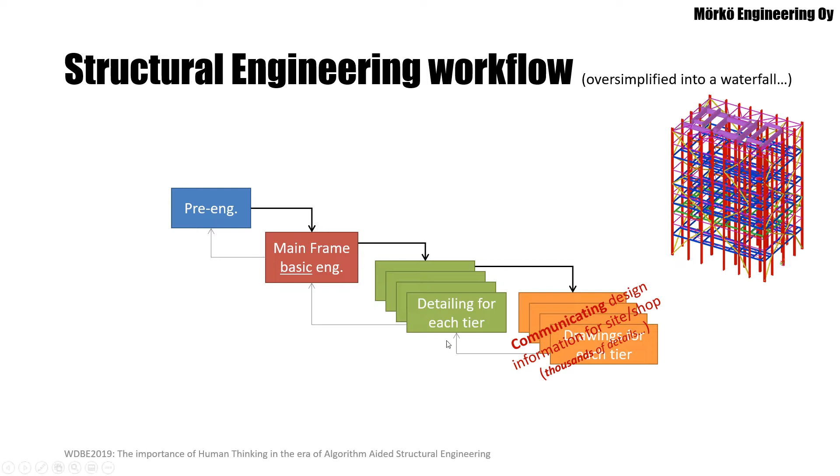Now, at the digitalization seminar, there were definitely some people present who don't like to talk about paper drawings anymore. So I just wanted to mention that the communication of the design information does not have to be paper drawings. That's important to mention when we're talking about digital built environment. But there is definitely some sort of communication phase where the design information is communicated to either the construction site or the workshop if the structure is prefabricated.

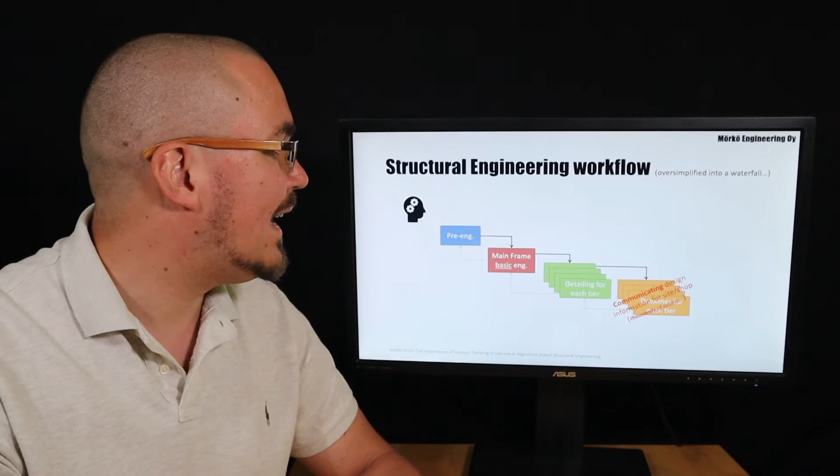Now, the beginning of this process does not have any raw material going on. An industrial process maybe has some raw material going on, but the design or engineering process of a construction is definitely a thinking process. There's only brain power going in as raw material, and then at the end of the process, there's not a single client who will order the project. Instead, there's a whole ecosystem of multiple stakeholders of the construction project, and all those stakeholders have an organization, and there's people in the organization for every single stakeholder.

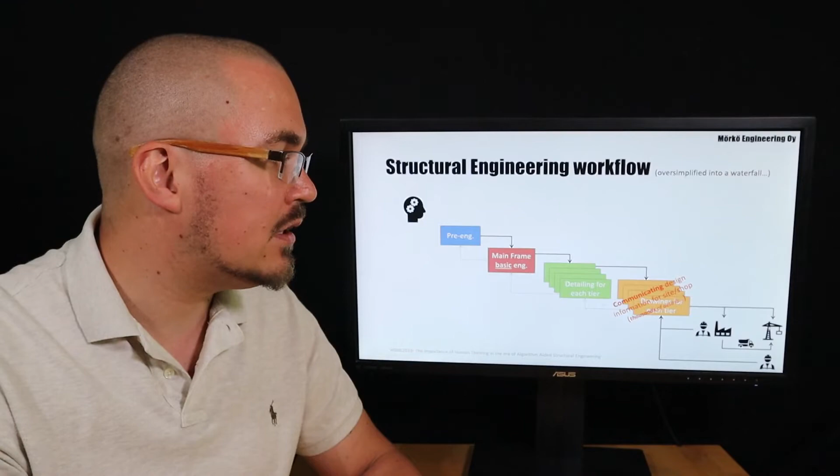All those people have some knowledge in their heads. They know their own stuff much better than the engineer here knows. And they need to be able to communicate that knowledge back to the design process or the engineering process, and that knowledge needs to flow up the waterfall model.

If you are familiar with the waterfall, you will know that information flowing down a waterfall is relatively easy, but flowing up a waterfall or flowing up of information in any kind of process is typically very, very hard. It's much harder, and when we have engineering process problems, they usually have something to do with the flowing up of information.

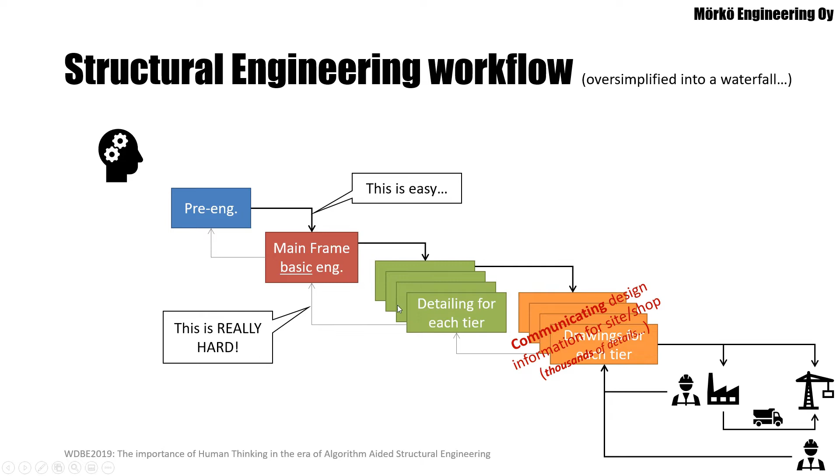Now let's talk about the algorithms for a little bit, and I'll talk about Teräs-Pertti, our own algorithm software. I'll illustrate it using the same waterfall diagram that we just looked at.

So in the beginning, in the blue phase, pre-engineering phase of the design process, human designers are mainly thinking about the blue things, the pre-engineering things, while they are also hopefully, and I underline hopefully, communicating with all the other stakeholders, visualizing the design outcome, and trying to achieve a common understanding with all the other stakeholders, because the pre-engineering, the blue phase, is where we make all the big decisions, although we haven't spent that much design time yet on it.

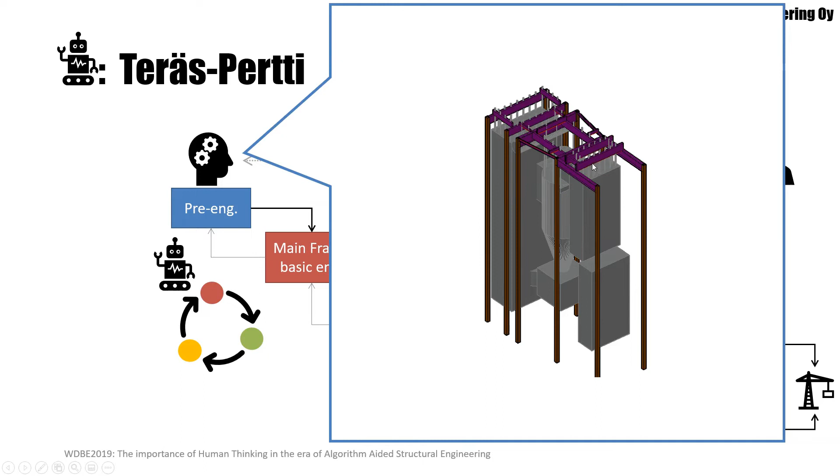Now, if we have the possibility to use algorithm-aided engineering, such as Teräs-Pertti, humans can be thinking about the overall topology of the structure, like the supporting of the actual boiler, which is the main purpose of the boiler building we are looking at here. Supporting of the boiler, and also some very important technical issue, such as seismic design of the structure.

So very often, if it's a seismic building in a seismic area, the most important part in the pre-engineering is achieving a working solution for the seismic design of the building. It doesn't have to be final, but we need to have an excellent strategy of how we are going to handle the seismic problems of this project, and that's an important task in the pre-engineering phase.

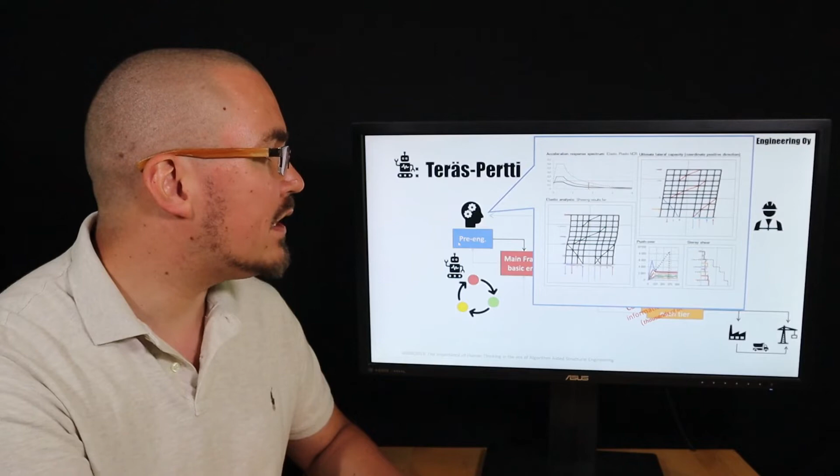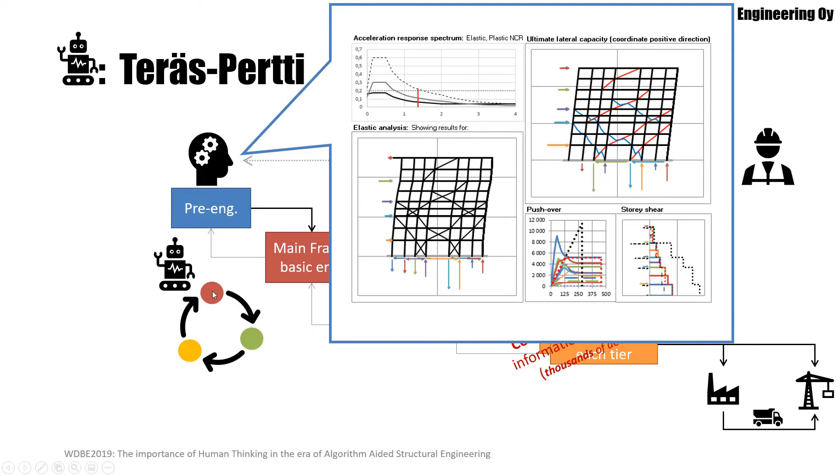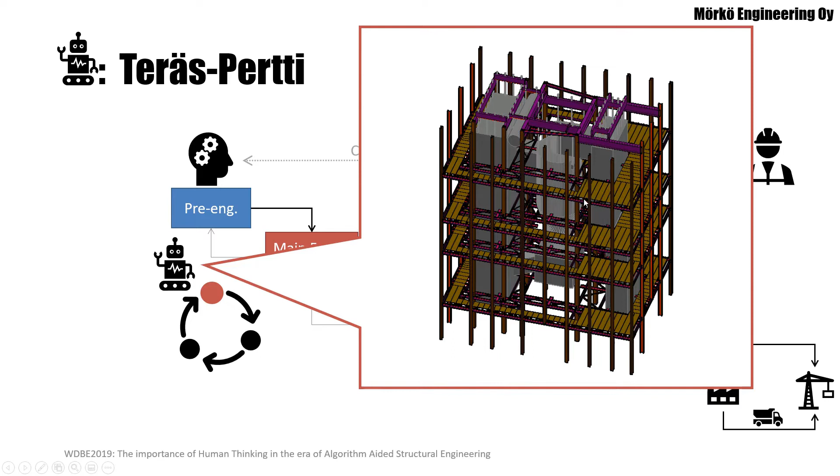Now, while the humans are thinking about this stuff, the blue stuff, pre-engineering stuff, algorithms can already be running a loop on the other things, the basic engineering, the detailing, and the workshop drawing phase. So algorithms can be doing the red thinking about main platform beam topologies and the platforms and stuff like that. That's important for the building, but maybe not in the pre-engineering phase yet.

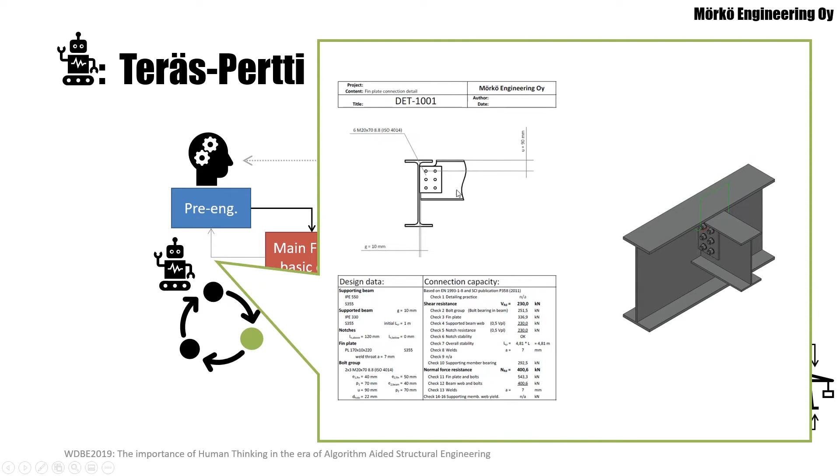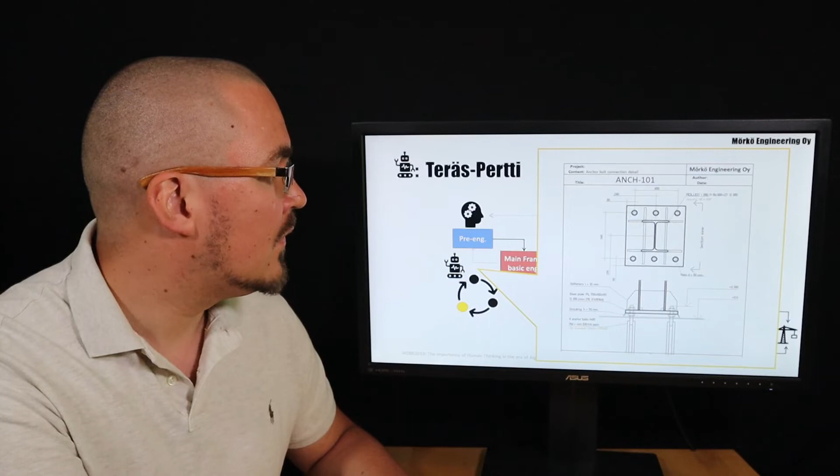Algorithms can already be running on the green things, the detailing things, so connection details, that sort of thing. And algorithms can already be running on making the documents, so that we will have details and we will have overall design where automatic drawing creation works as well as possible, so that it saves human labor in the process. So that's the idea of pre-engineering algorithm-aided design.

Algorithms can produce information about the rest of the design process semi-automatically, while humans are mainly thinking about the blue things and communicating the design to all the stakeholders, visualizing it with the aid of algorithms, and trying to achieve a common understanding with everyone else in the project.

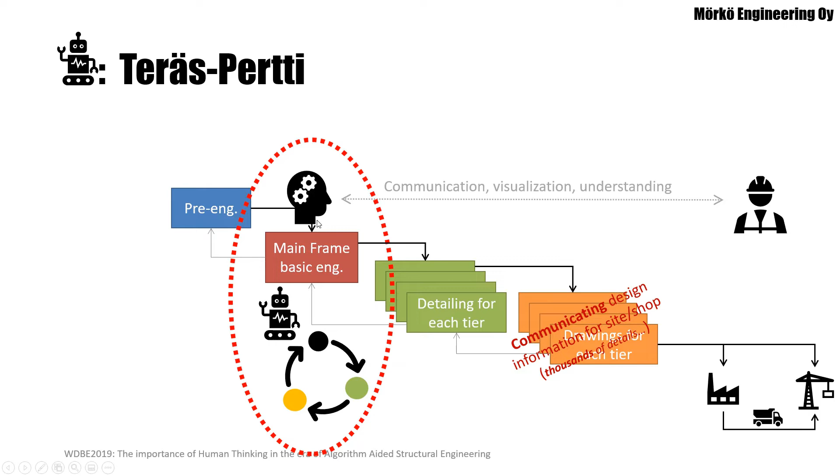Now let's look at the red phase, the basic engineering phase of the main. Now the pre-engineering is already done, and now humans are thinking about the red things. Humans are thinking the basic design of the structure, platforms, platform beams, calculation models, and already maybe producing calculation reports. And they have to be producing calculation reports so that they can communicate the results to everyone else in the project.

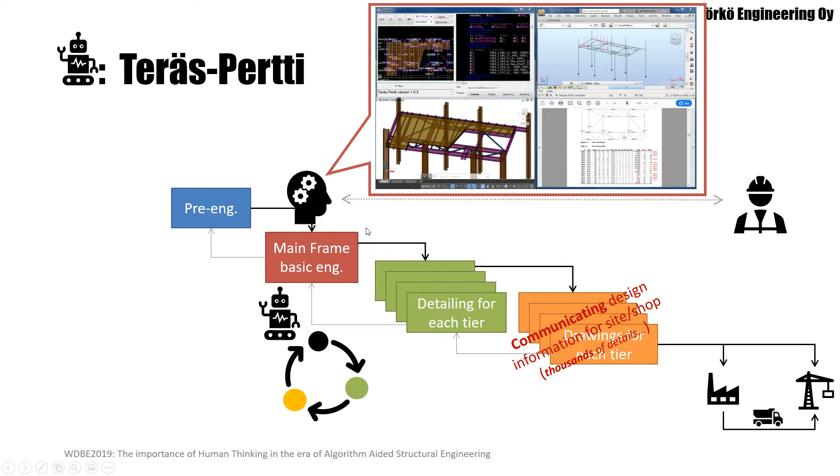Now there's the Teräs-Pertti user interface, which is here controlling the three others. So Teräs-Pertti at the same time is running, or the algorithms are running on the detailing things, maybe connection detailing and other details, and then they are running on the orange things, the automatic document creation.

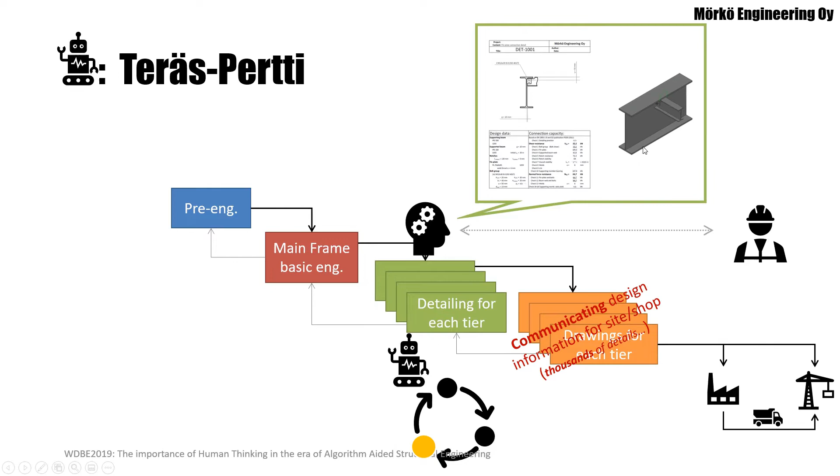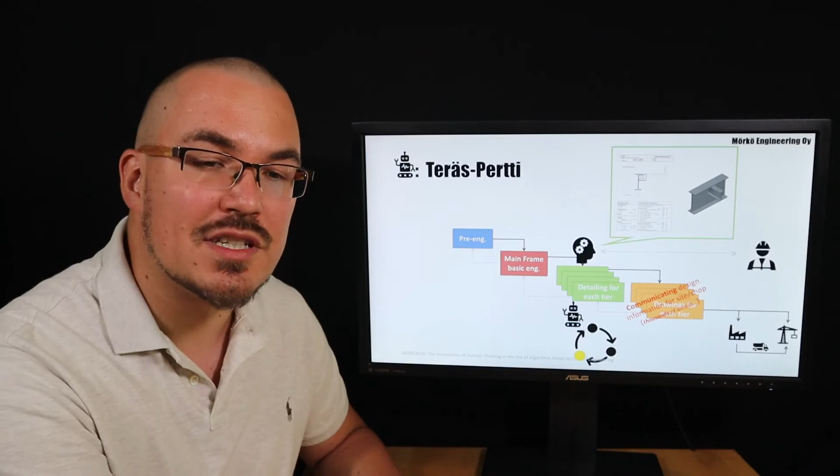Now let's go to the detailing phase. Now in the detailing phase, it's very important for humans to be thinking about the details. In the previous stages, they were made quite automatically by algorithms, by Teräs-Pertti, but now we need to actually design all the details. Many of the details we can use the automatic ones, but then we need the human brain power to solve the things that algorithms couldn't solve in the previous stages, or where algorithms seem to be going wrong.

And then algorithms can still be running on automatic drawing creation, making sure that when we reach the orange stage of the building, of the process, there's not much for humans to do. All the drawings, all the documents could be as automatic as possible. So in the documentation stage, humans are thinking about drawing creation, document creation, and hopefully they don't have much to think about. Everything's already been automatically documented before.

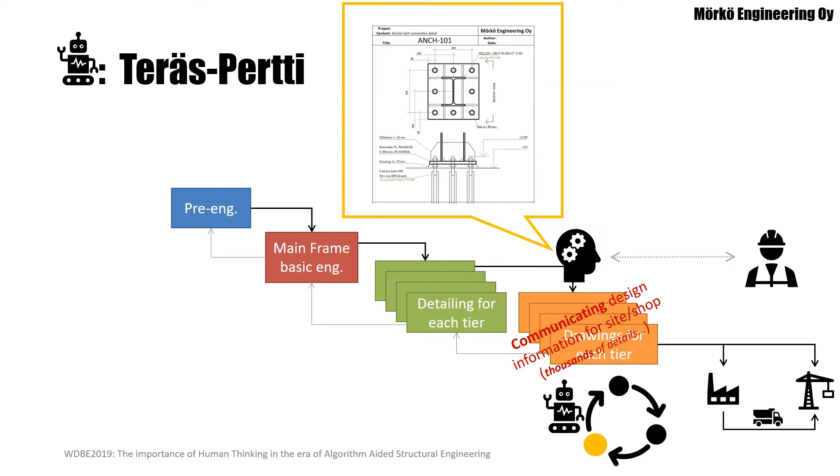Or to say that better, all the automatic algorithms that are creating the documents are working properly so that humans can create the documents as automatically as possible in this stage. Not fully automatically, some things always need to be fixed by hand, but the amount of that stuff should be as small as possible if we want to get some advantage from the algorithms we've been using all the time.

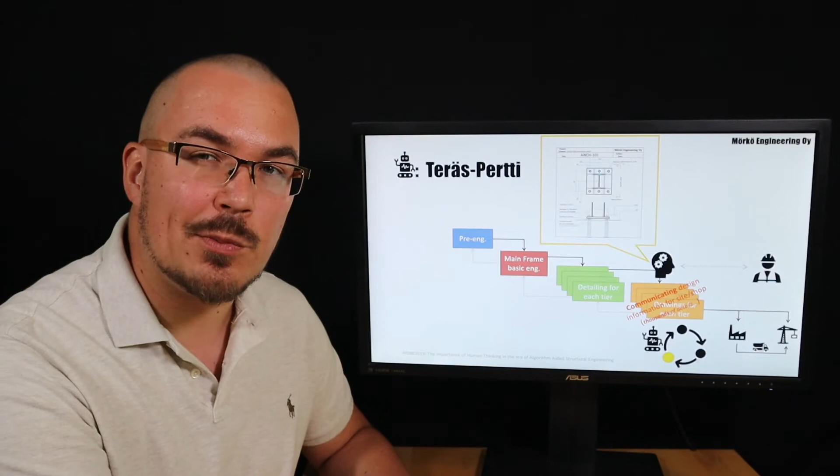So that was about algorithms. Let's next talk about humans. So what are humans good at? We already learned that algorithms are good at repeating simple design procedures over and over and over again, tirelessly, thousands and thousands of times, relatively quickly. And algorithms are very good at making documents automatically, at least some kind of documents. Maybe if they're too complicated, humans need to fix something, but algorithms can make quite good documents quite automatically.

Now humans are very good at communicating things, important things, to other human beings. And I've been using a red communicator symbol here to illustrate this stuff. And humans are very good at teamwork. Humans are very good at managing other humans, especially some people are.

Now humans are also good at understanding complex and abstract things. Algorithms can make complex mathematical operations, for example, but they don't really understand what they are doing. They're just high-speed idiots, and that's why I need humans who actually understand the complex and abstract things very well and understand what they are doing the analytical analysis for. And they are good at simplifying complex problems into a series of less complex sub-problems. So simplifying things that are complex into a series of solvable sub-problems. This is what the bluish thinker symbol here stands for in my next few slides.

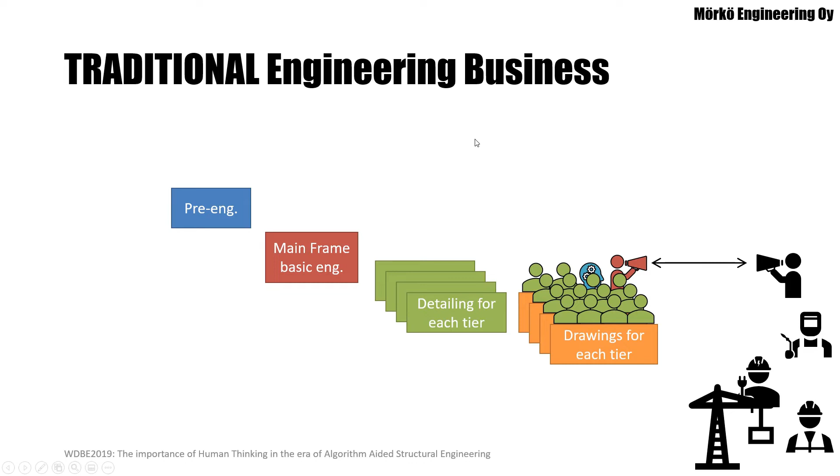And the project management or the communication guy definitely will be part of the project team throughout, also in the construction phase, because definitely the construction site or the manufacturing workshop who prefabricates the structures will need to be able to communicate with the designer even in the erection or construction phase. So the manager definitely is from the start to the end.

Also, a thinker guy, she or he will have lots to do in the early stage of the project, and maybe less, but definitely will be an important person in the detailing and documentation phase, and probably, especially if there are any changes in the construction or anything that couldn't be predicted, the analysis guy will be an important person of the team even in the construction phase of the project.

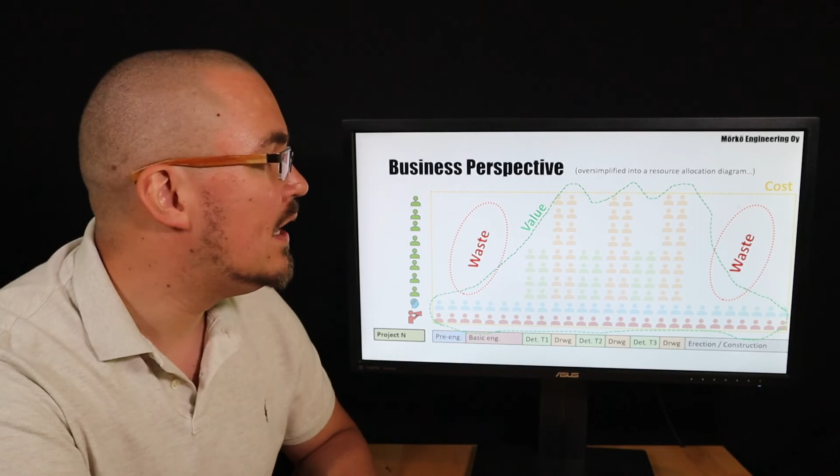Now to reduce this waste and to get rid of the waste, the company would be tempted to sell more projects. There would be a project N, which is our project that we just looked at, and they would have a previous earlier project M, that the same green people were working on, but then there's an added second project manager and the second analysis person who are working on the project M, and then there's a blue and red guy working on project N, and maybe the same green guys are allocated to both projects at different times.

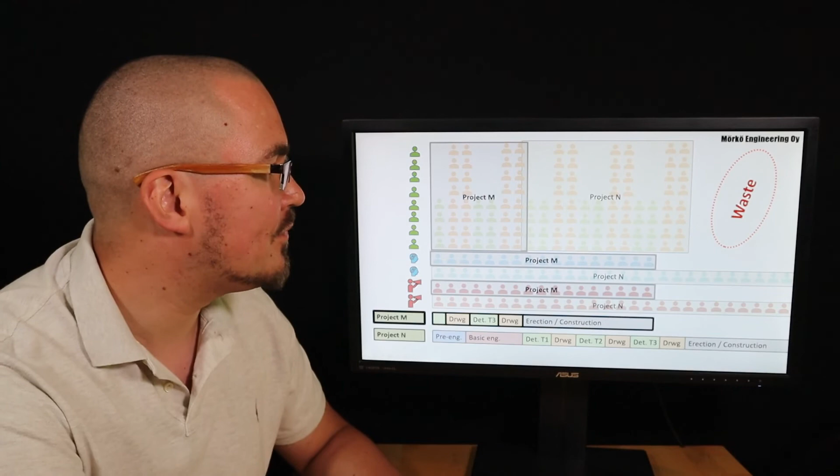And then there needs to be yet another project to get rid of this waste. So to get this balanced, they need to be selling more projects. Now, these people maybe don't have overlap because the process is optimized for them, but this blue guy and red guy have an overlap here.

They need to be spreading their time between multiple projects, the end of project M and beginning of project O, and that will eventually make them angry. I have the angry face symbols here to represent. We have a conflict there. We've been optimizing one resource, and at the same time we've been overbooking the second resource, and we've been making the second resource quite angry.

Now that's not enough. We still have some waste left here because we are not working in the detailing phase with the same amount of people as in the drawing phase. So maybe we saw the process a little bit, making it a little bit more effective. Two guys are leaving, and then we have overbooked people here too. It looks very effective because we are using the resources optimally, but some of the people are getting angry because they are not working the way that would be comfortable for them. So we have more angry people here in the organization.

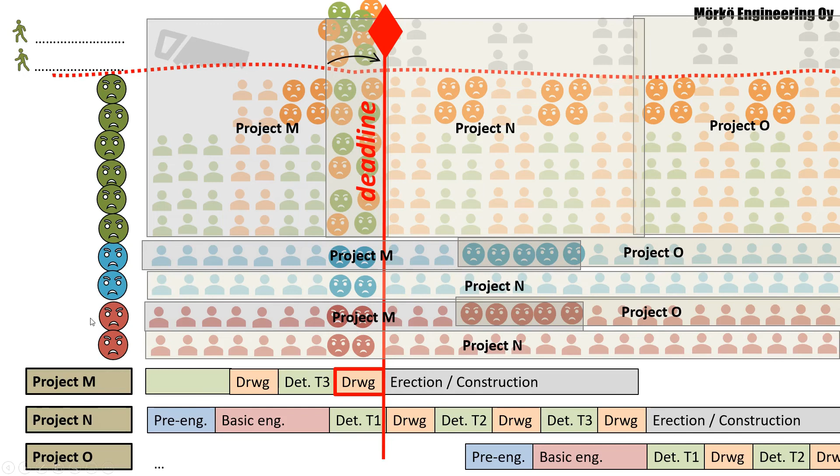Now, everything was based on a schedule that had deadlines that were decided beforehand. Now, sometimes projects go wrong, timetables and schedules are changed, deadlines are moved, and if we've booked the resources too tightly, we will have overlap here with the green people also. And this type of change will break everything. We will get all the faces here angry faces. Now, if we have too many angry faces, people will start leaving our company. We just cannot handle too many angry faces. They will think that maybe the competitor's organization is better, and they will leave.

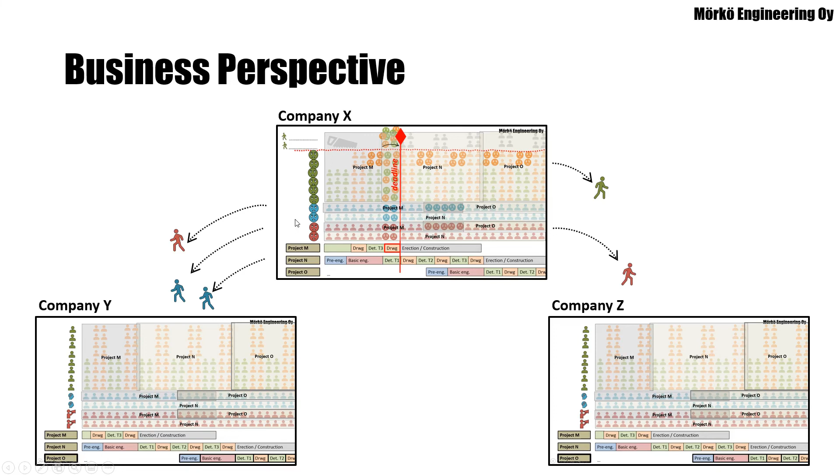Now, unfortunately, the competitors have their own problems. They have exactly the same problem because they are using exactly the same business model. So they have their own angry people, and those angry people are leaving the company also. And then we end up in a situation where there's just angry people going round and round from company to company, and each company is equally shit, and we are just covered in angry faces. And this, in my opinion, is the way to fuck up an entire industry. Now, my goal here is not to teach you how to fuck up an entire industry. Instead, my goal is to teach you how to do quite the opposite.

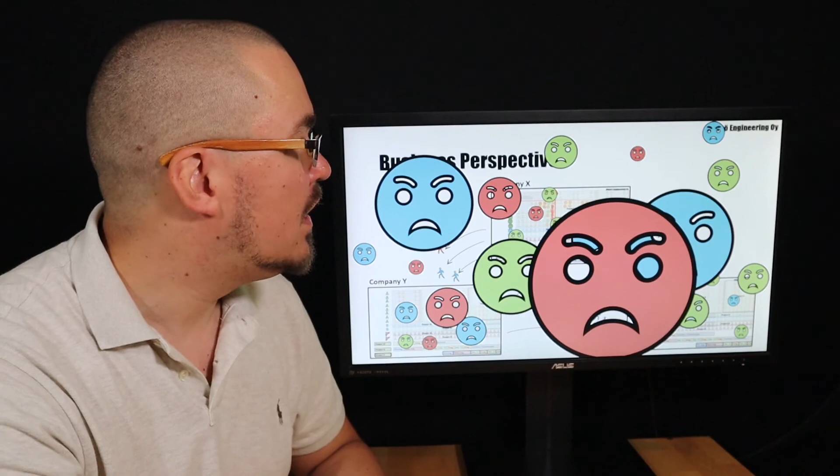So let's next take a look at algorithm-aided engineering. So in the algorithm-aided engineering process, you still need your red communicator, team leader person in your team. You still need your blue analytical thinker guy in your team. But much of the heavy lifting in the detailing and documentation phase of the project can now be done almost automatically by algorithms. So for the green and the orange phase, you might need just a little fewer people and more algorithms. You need someone to write the code for the algorithms and be running them. That's the purple guy. And probably you still need a few green guys to do manually some of the stuff that the algorithms couldn't handle, even though they tried.

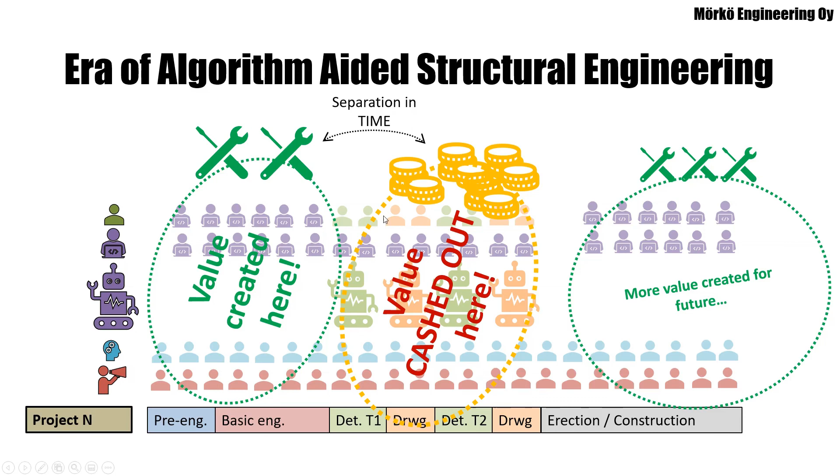Now, much of the writing of the algorithms must happen before the busiest detailing phase of the project. You cannot wait until the busiest time starts and then start writing the algorithms. You write the algorithms beforehand. And that changes business-wise, I think, the engineering process quite a bit, because the time outside the busy project phase is no longer considered waste. Instead, it's value creation time, and the project time is called value cashing out time. Value is created outside the busiest project phase, and value is cashed out in the busiest project phase. There's a separation in time between these two times, and that changes everything, because extra time is no longer considered extra waste. Instead, time now equals time for additional value, time equals flexibility, time equals resilience, agility, and time equals freedom.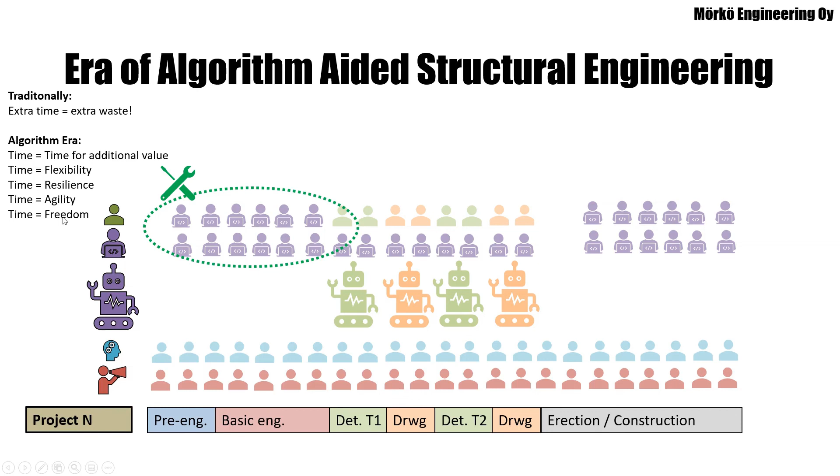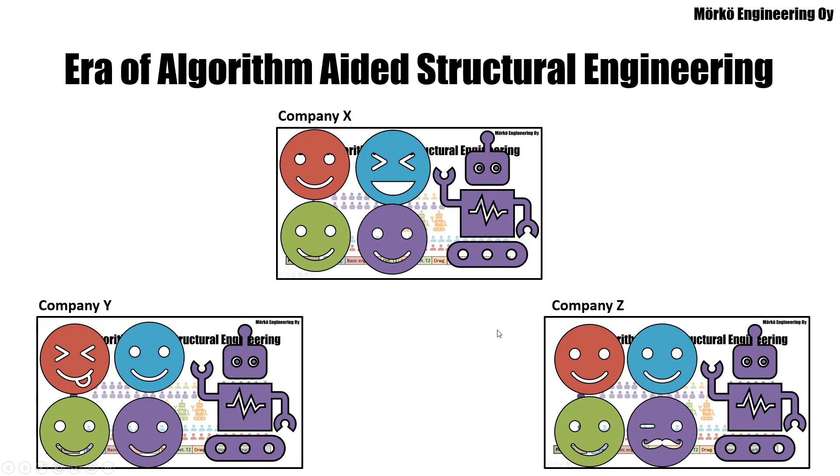And in the industry side, that might just change everything, so that no longer you will have the angry faces. Instead, you will have happy faces in your organization and everyone else's organization. And this is the happy future we are aiming for.

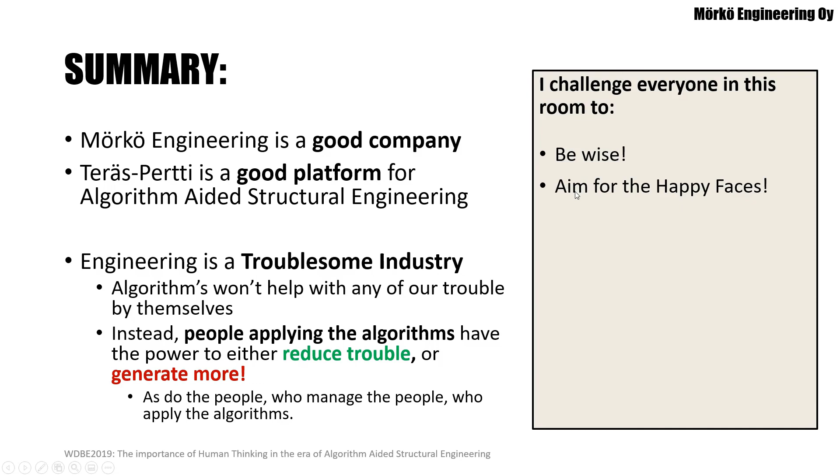So it brings me to the summary of my presentation. First of all, my 3 points. First point, Mörkö Engineering is a good company. Second point, Teräs-Pertti is a good software for algorithm-aided structural engineering. But my third point is that engineering today is quite a troublesome industry, and algorithms by themselves won't help much with any of that trouble. Instead, it's the people who are applying the algorithms who possess the power to either reduce trouble or generate more trouble. And moreover, it's the managers who manage the people who apply the algorithms who possess this power, either generating more trouble or reducing trouble. And that's why we need to be wise, and we need to be aiming for happier times. We need to be aiming for the happy faces.